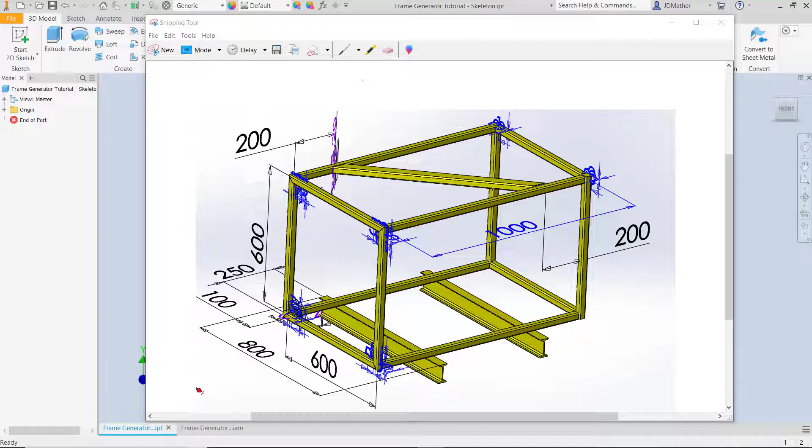In this example, I want to demonstrate how to use the frame generator to create this workbench frame that is 1,000 millimeters deep from front to back, from center line to center line, 600 millimeters wide by 600 millimeters tall, and with a cross brace 200 millimeters back from the front and forward from the back, and with two SB 80 by 6 beams at the bottom. So let's look at how to set this up.

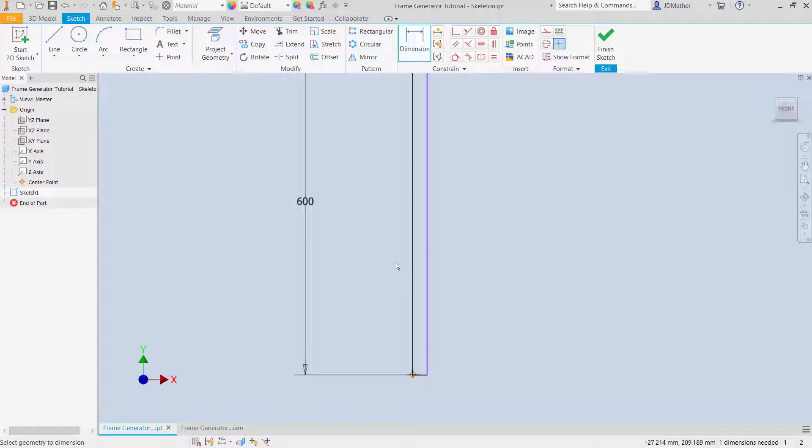First thing I'll do is I'll start a new sketch on the XY plane, and normally I model with symmetry about the origin, but let's say that we want to do some measurements, that we have a fixture that we need to have the origin in a particular location. And so I'll put the origin here in the lower left hand corner, and I'm going to dimension the height of this as 600, and let's assume that we might want to change the width to be other than 600.

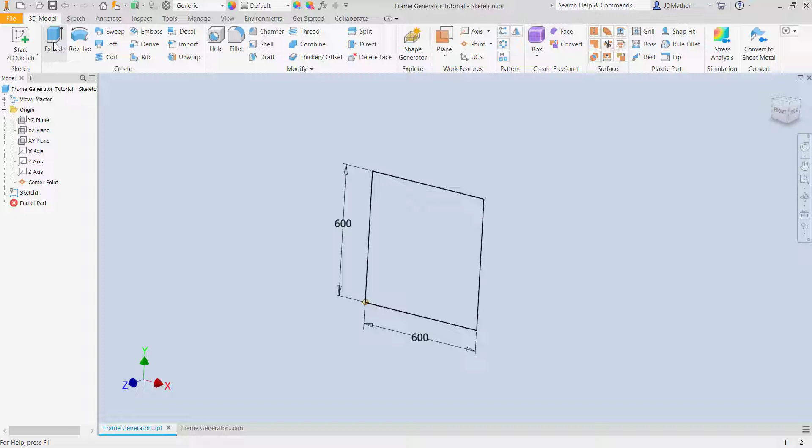So we'll start out with it as 600, but by putting a dimension in there rather than making it equal, we can change that dimension if needed to either make the height taller or shorter, or this width narrower or greater. And then I'm going to do as the next step a trick that a lot of people don't know about, in that I'm going to go ahead and extrude this rectangle, and I'm going to do it as a surface body rather than a solid body. So I toggle to a surface body, and I'm going to go 1,000 millimeters, and I want to flip the direction towards the back.

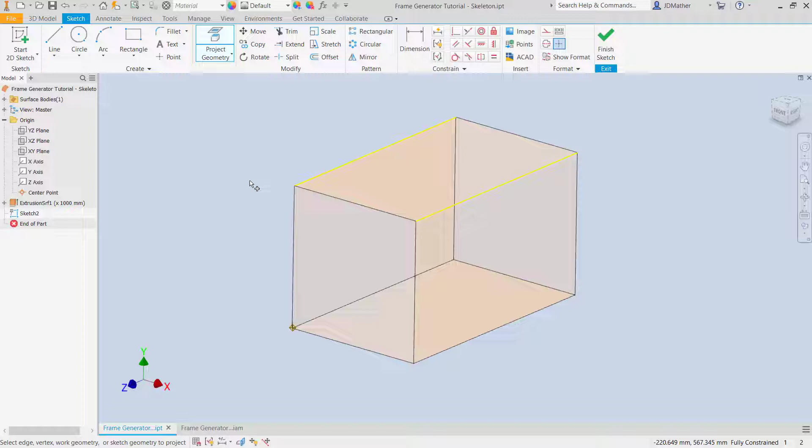All right, then I'm going to do a new sketch on this top face, and I will project geometry, this edge right here and this edge right here, and then I will draw a line. Now I might just do this as a 3D sketch rather than as a 2D sketch, but I've already started the 2D sketch. But a lot of times it makes sense to do a skeleton for a frame like this as a 3D sketch. So I'll dimension from this point to this point as the 200, and I'll dimension from here to here as the 200 as well.

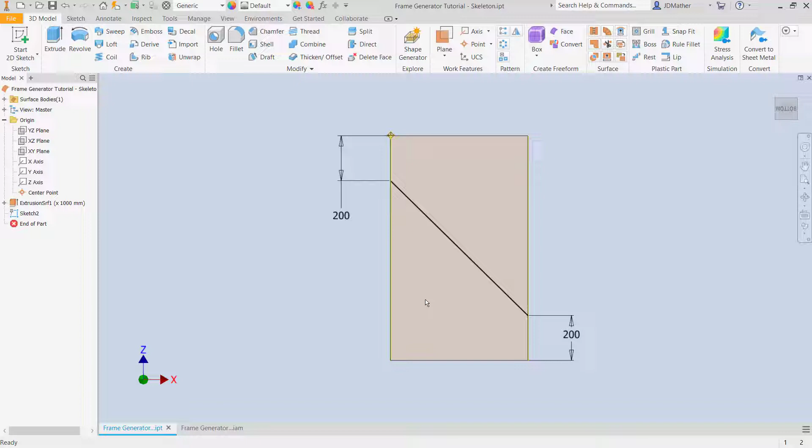I'll finish this sketch, and then I'm going to rotate around to the bottom, and I'll do a new sketch on the bottom, and I will draw a rectangle about like this, and then I'm going to put a line from midpoint to midpoint across that rectangle as well. I'm going to change all of these lines to construction, and then I will do a coincident, and I want to project first this bottom edge right here and this bottom edge right there, and then I'll do coincident of this line to the midpoint of this line.

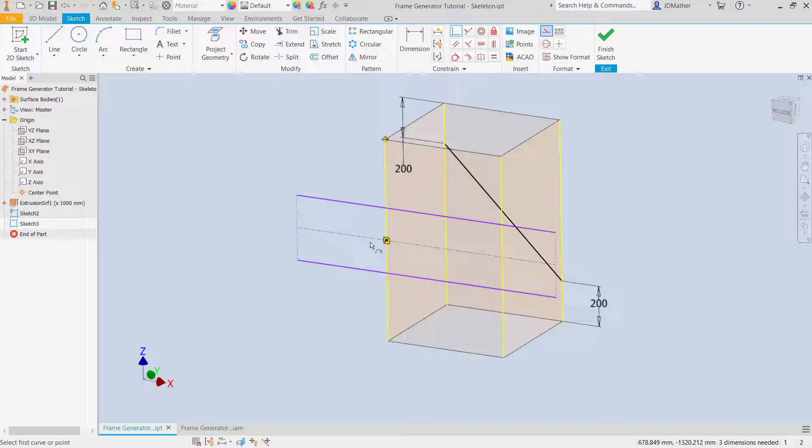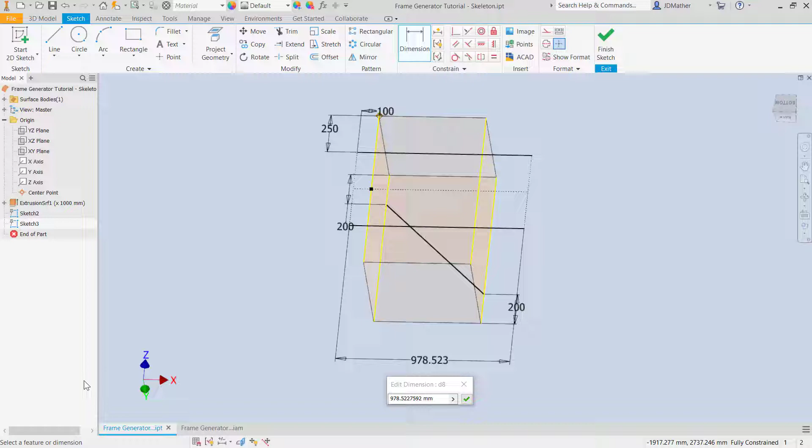And then let's put some dimensions in here. So I'm going to dimension the distance 100 from here to here, and I'll dimension the distance from here over to here as, and that should have been 100. Let's change this one to 250, and then I will dimension the width of this rectangle as 800, or dimension it to the midpoint of this line. So this line is the same distance on this side of the midpoint as this one. All right, I'll finish sketch, and I'm going to turn off the dimension visibility on both of these sketches.

And again, I could have done these two sketches as one 3D sketch. So a lot of times when I'm doing a frame skeleton, I prefer to use a 3D sketch on a box like, and I might use that box as a keep out zone or a keep within zone. In this case, we're going to run right down the center of the lines, but often I'll use that for keep in or keep out. Let's go ahead and save this, and I'll save this as frame generator tutorial skeleton.

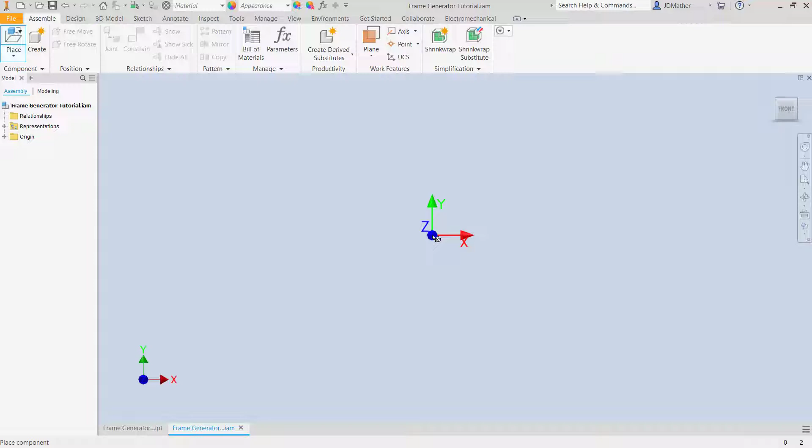Then I need to place that skeleton into an assembly. I'll go to an assembly, and I'll place my skeleton, and I'll place it grounded at origin, and so there is my skeleton. And then I will go to the design tab. If you are using Vault, you'll need to log into your Vault.

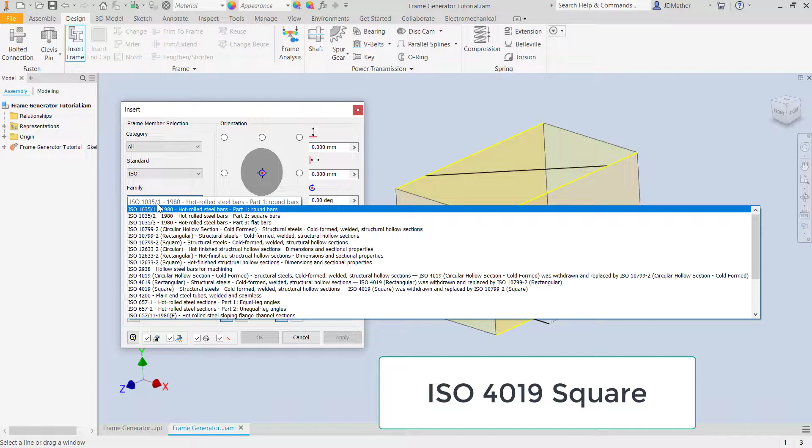I'm using desktop content, so I can go directly into insert frame, and I'm going to select ISO standard, find square, and select a size of 30 by 30 and 2.5 wall thickness. I'll then select this edge, and this edge, and this edge, and this edge. So I have those 4 edges selected.

I'll also select this edge, this edge, this edge, and this edge. You can select the edges of other bodies, surface bodies or solid bodies, or you can select point to point - you don't have to have a sketch in order to select an edge. I'll get these 4 edges, say OK to that, and apply to that.

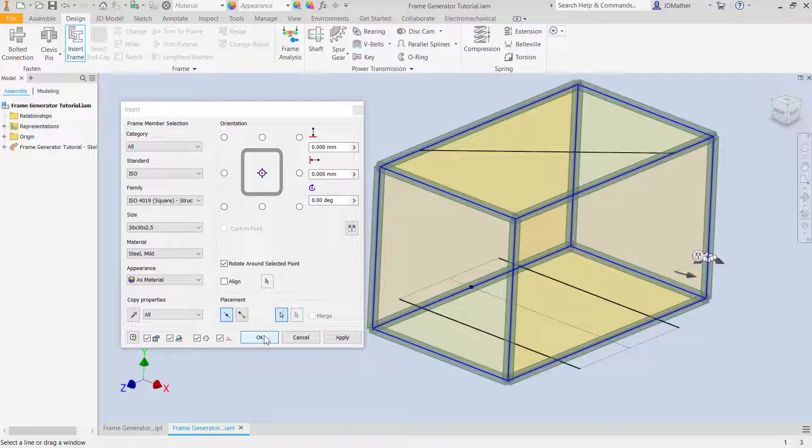I'll save those components, and then I'm going to change to a rectangular shape, and for the size I will select a 50 by 30 by 2.5 wall thickness, and I will select this line.

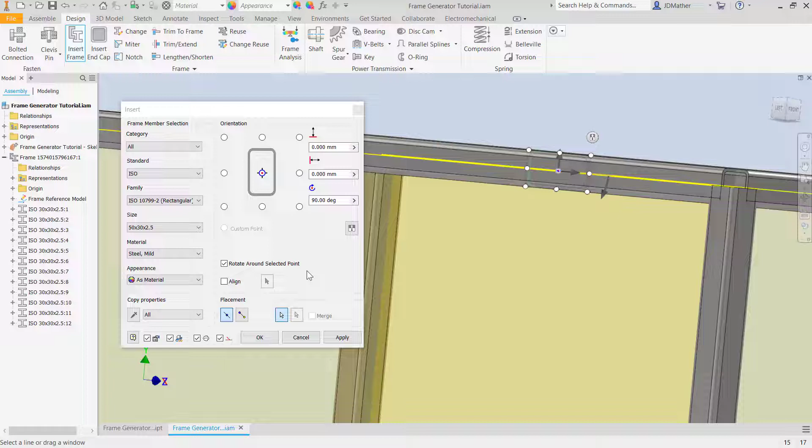Now, if we look at this from the end, we see that we need to rotate this 90 degrees. So if I drag this, it turns red at certain stop points, or I can just come over here and type in the angle I need to rotate it - in this case, 90 degrees.

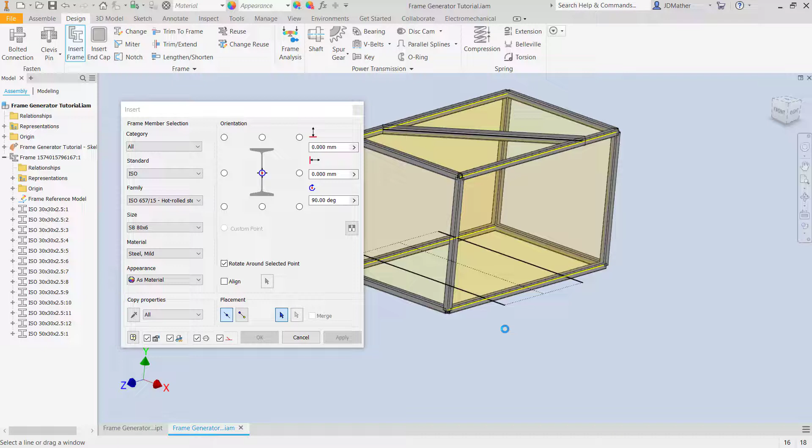I'm then going to place the two beams down here, so I'll do insert frame member, select ISO 657/15, and for the size I'll select the S8 80 by 6. Then I will select this line and this line, and we see that we need to rotate those by 90 degrees, so I'll rotate them by 90, either 90 or 180.

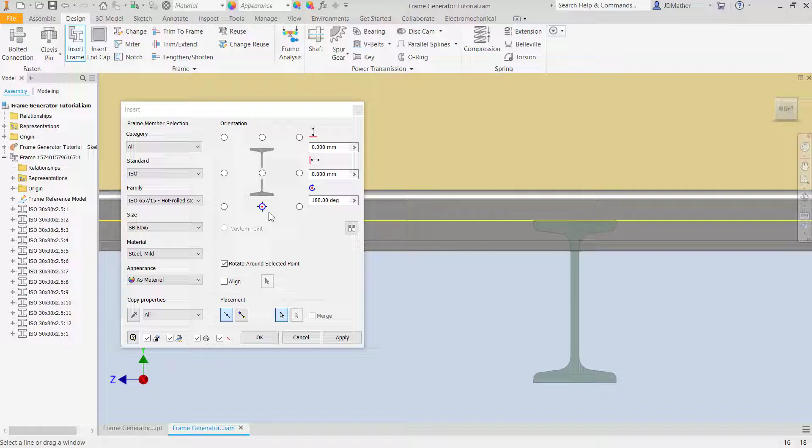I also need to move these down, so I'm going to select this point, but I need to move it down further. Remember, this distance from here to here was 30 millimeters, so I need to move this down another 15 millimeters. I'll do an offset of 15 millimeters, but I see it moved it up, so I need to put in -15, and that moved it down to the bottom of our frame.

I'll now turn off the visibility of the skeleton and save my file.

I want these four corners to be mitered, so I'll select miter, and I'll select these two components. I could also put a gap in here.

When we make parts in the real world, we can't cut exact lengths. So if we want to weld this thing up to be perfectly square, we need to cut some of the parts a little bit shorter so that we have some distance to play with in squaring up the parts. Because when we cut a part, some are going to be a little bit longer, some a little bit shorter, so we need our longest part to allow us a little bit of allowance to square up the parts. So I'll say apply to that, and let's add another section.

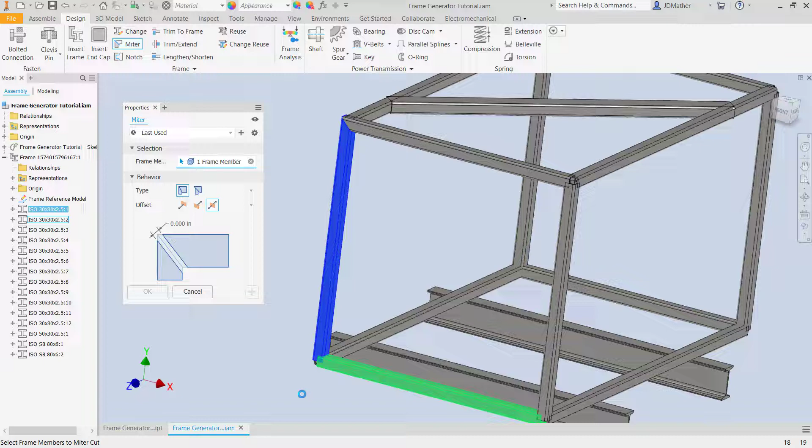So I'll select these two, and add that one. Then I'm going to put my clearance over here on this side, and make this real nice and big so we can see it. I'm going to say 5 millimeters - make sure you put the units in, because I noticed that was showing inch even though I'm in a metric file.

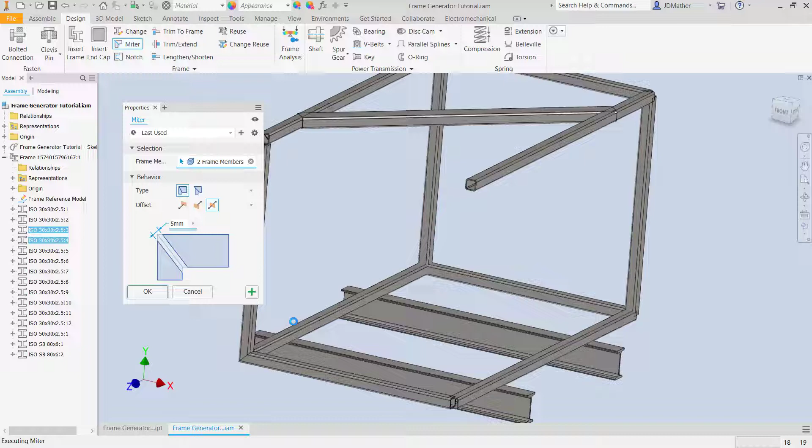Then I will select this one and this one, and when we do that, we see that we have a clearance in between here. Then I'll accept that one, and do this one and this one, so now I see that we have a clearance down there. So we can put these two up tight against each other and then do our adjustment on this side.

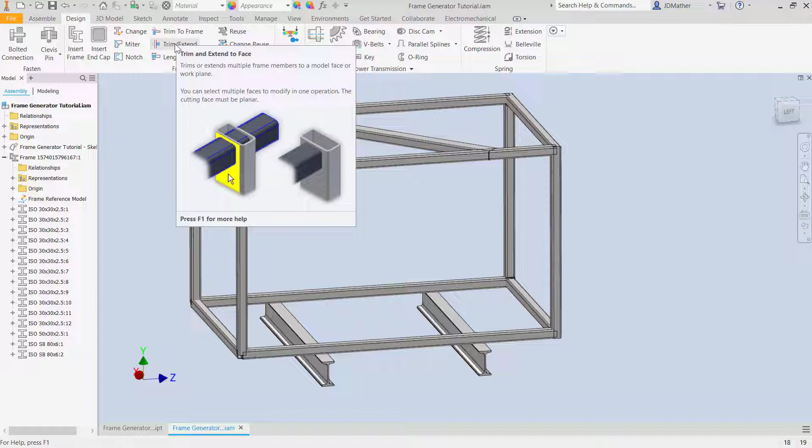Then I want these frame members to stop at here, so now I have two different choices. I can do trim to frame, or trim extend. Let's check trim to frame first - it says select members to trim cut, and then select frame members to trim cut. So the tooltip doesn't really give us a good idea of what's happening.

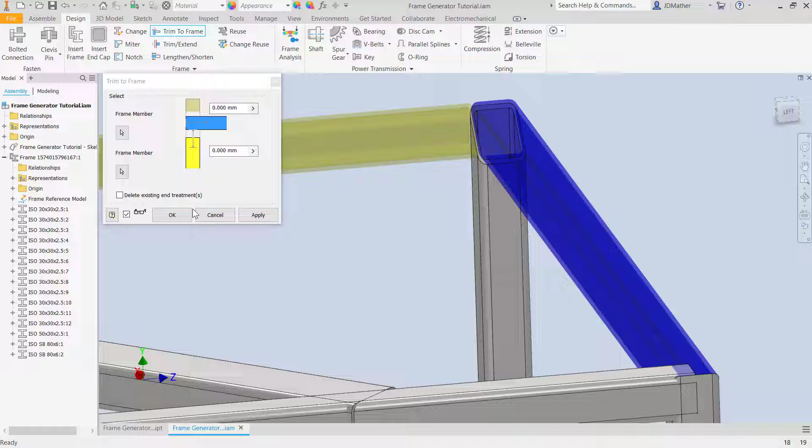I want to select this as the piece that I'm going to use to cut with, and then I'll select this one, and we see that it trims this one back to that location. I'll say okay to that. It says there's a problem with this because of a previous end treatment that we have, so I might not want to do it that way.

Let's do a manage rebuild all, make sure we don't get any errors. So I'm not getting any errors, but I'm a little concerned about that technique, so let's look at a different technique. Instead of doing trim to frame, I'm going to do trim or extend, and it says select frame members to cut or lengthen, so I want to cut this one and this one, and then I can select the face that I want to use to cut with, and I can select any one of these planar faces, this one or this one.

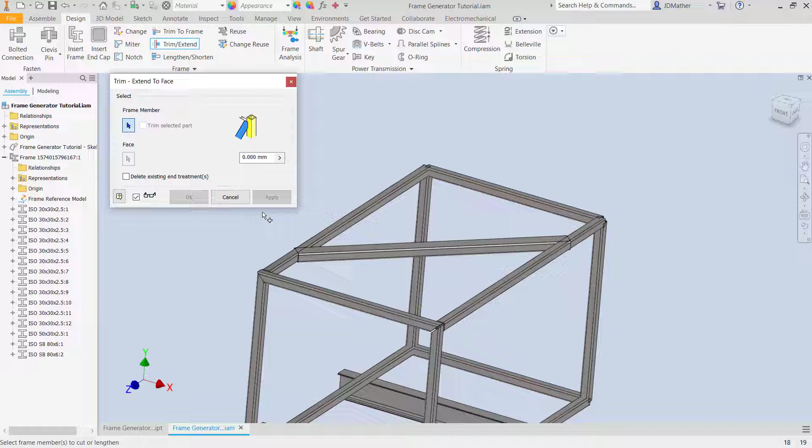It will extend that out and cut those pieces off, so think of those surfaces as going out to infinity. All right, then I'm going to go ahead and trim this part, so I'm going to trim that face, that frame member, and then for the face I will select this end, and then I want to do it over on the other side. Now if I wanted to notch this to have it go around the arcs here, I can attempt to do that with trim to the frame, or I can do the notch.

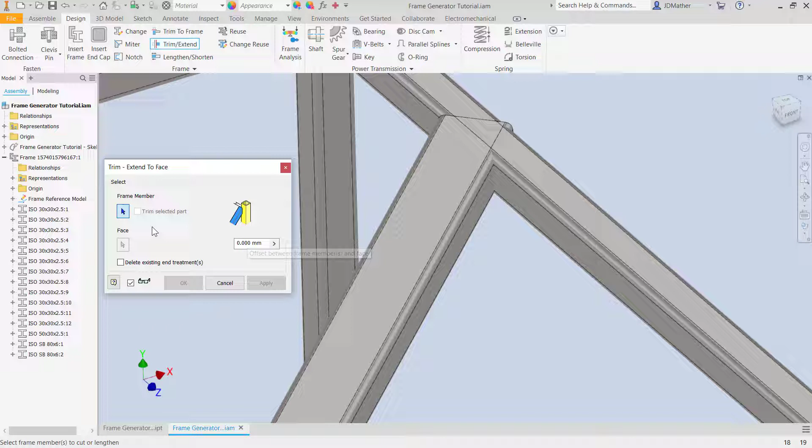I want it to be flush with this face, but I'm actually going to put in an offset distance. So I'll select this frame member to trim, trim it to this face, and let's do a 5 millimeter offset. I'm making that nice and big so we can clearly see that offset. We might not want an offset that great.

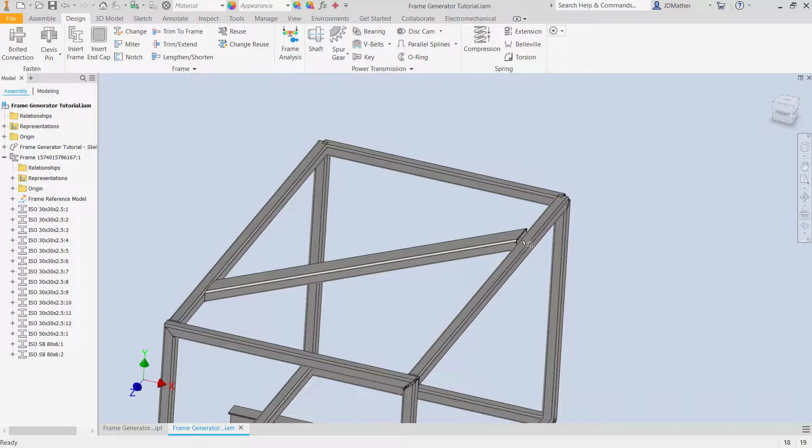All right, so that gives us some clearance so we can put this part in here and weld it, and we have some adjustment here, and we can fill that gap with a weld bead. We don't necessarily have to have it that great to start with. I'm then going to trim off these two components with this one.

So let's try to trim to frame again. I'll select first the piece to use to define, and then I want to trim this part, and we see that this one goes down and this one gets cut off, right? I'll apply that, and then I'll do that again.

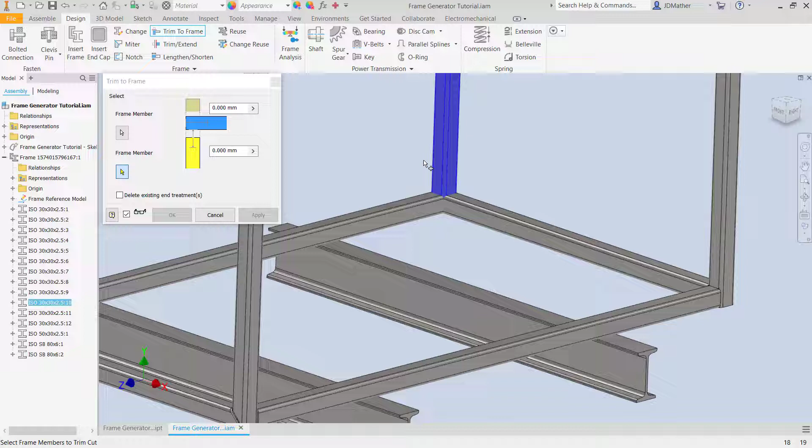I'll select this one and this one, so now this one will get cut. I'll come over here, select this one, and then select this one, apply that. So this gets extended. I'll select here and then here, then this one will get cut.

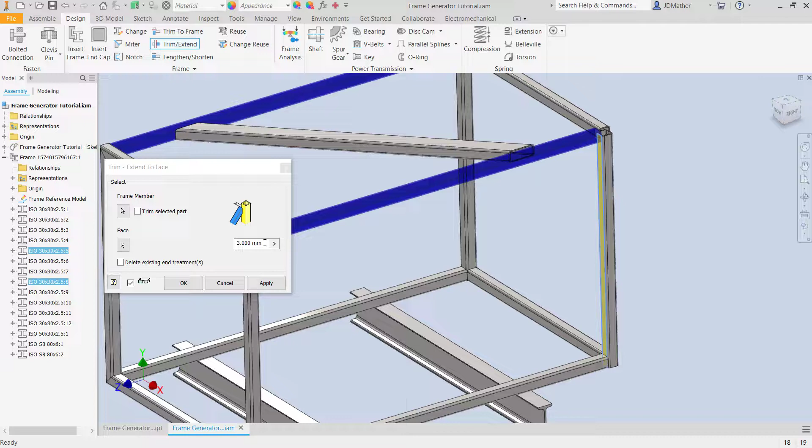I'm then going to trim these two members off with this frame, and I can do both of these two at the same time. So I'll do trim extend, select this one, and then the face I'll use is this face, and I want to put in an offset on this one. So I'm going to put in a 3mm offset on this one, and we'll see that we have a little gap in between here.

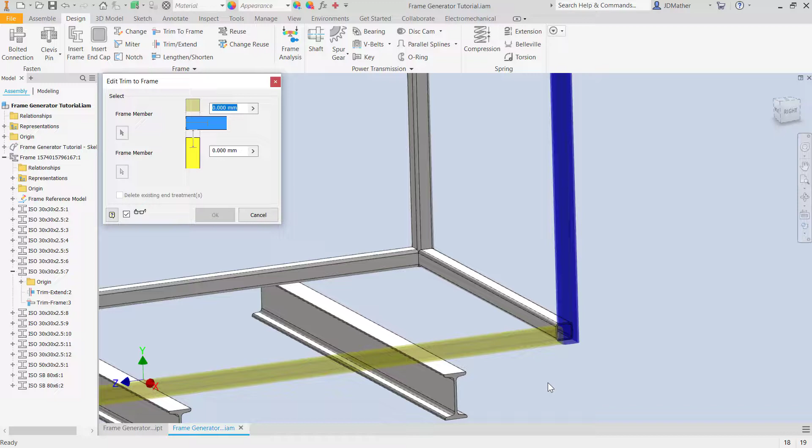Now actually I decided I don't want the gap on that side, so I'm going to undo that, and I'm going to do this one - I really intended for this one down here to have that 3mm gap. So let's edit that end treatment, and we'll put in the 3mm gap down here.

Okay, so now we see that we have a gap here, and I also want a gap over here, so I'll edit that one with the frame generator. I'll expand this one, find that trim, and edit that end treatment with the frame generator, and let's put in a 3mm gap on that end.

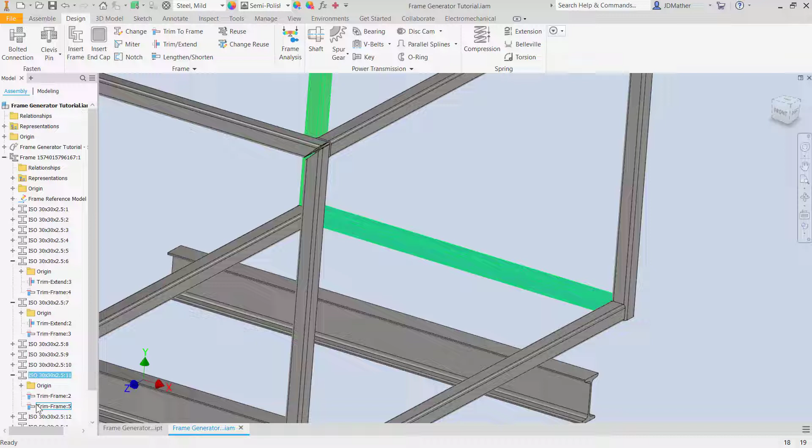I also want a 3mm gap on this end, so I'll find that frame member, and come down and find the trim for this one. So I'll edit that with frame generator, put a 3mm gap on this end. So now I have a gap in here.

So we have some allowance that we can move this piece back and forth to get everything squared up. We need to do the same thing up here at the top, so I'll do trim to frame, or trim extend, and I'll trim this part.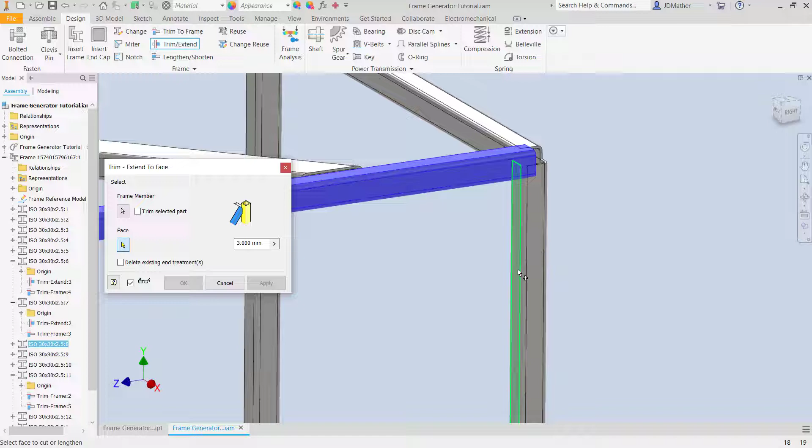I'm going to use this face to trim it with the 3mm gap, and this part using this face with the 3mm gap. On this side I don't want the gap, we'll butt those up against each other, so I'll put this back to 0.

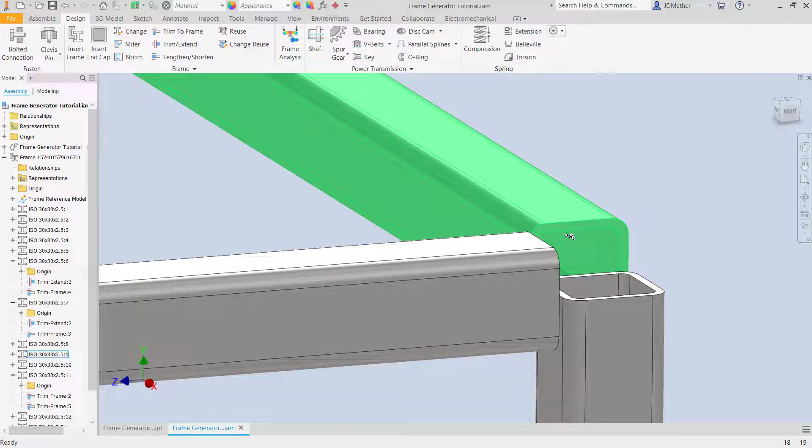Then I'll trim this piece with this face, and I'll trim this piece with this face. Now I want this piece to come up 3mm below the top of the frame, so I'm going to extend this piece up to this face, but I don't want it to come all the way up, so I'll do a 3mm gap, so it will be slightly below.

Apply that, and then I'll do the same thing over on the other side. I'll select this part, want to come up to this top face, but with the 3mm gap. I'll say OK to that.

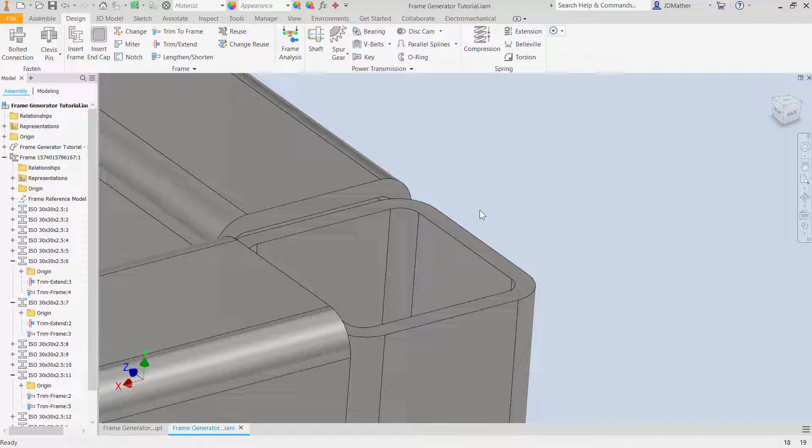Now I want to put an end cap on these two vertical tubes, so I will click on Insert End Cap. I'll select this face.

Now if you're using desktop content, you need to make sure you have the custom content library installed to use the frame generator end cap. So I got an error, so I need to install it into my desktop content.

If I close all of my files and then go to the active project file and select Configure Content Center Libraries, I see that the custom content was installed, but it wasn't selected in my project file, so I have to select that.

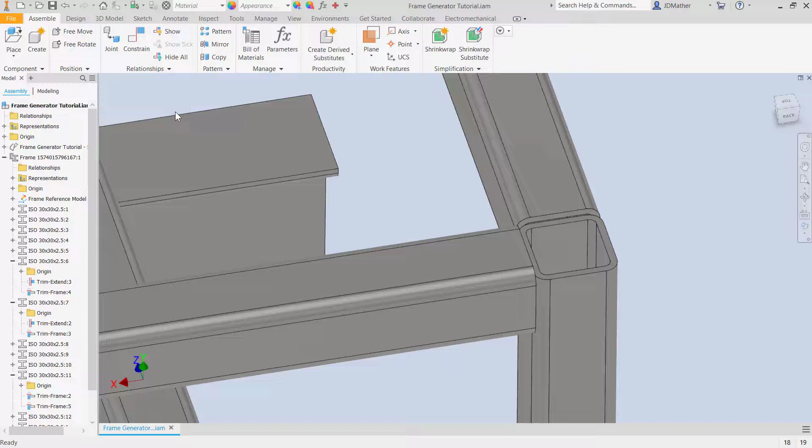I'll say OK to that, and done, and then I'll reopen my frame, go back to the design tab, and do insert end cap again, and select this face. This time I don't get an error on that.

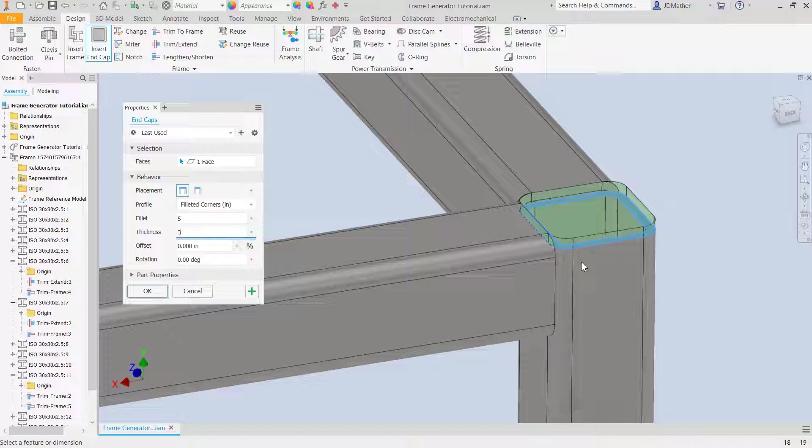I'm going to put a fillet radius of 5 on here, and I want the thickness to be 3mm so that it will be flush with the top of the frame. And then I want an offset distance. I can do this as a percentage of the thickness of the beam, or I can put it in as a distance.

I will do an offset distance of 0.5mm, and then I will add the second one, come over to the second end, select this one, and I'll say OK to this one.

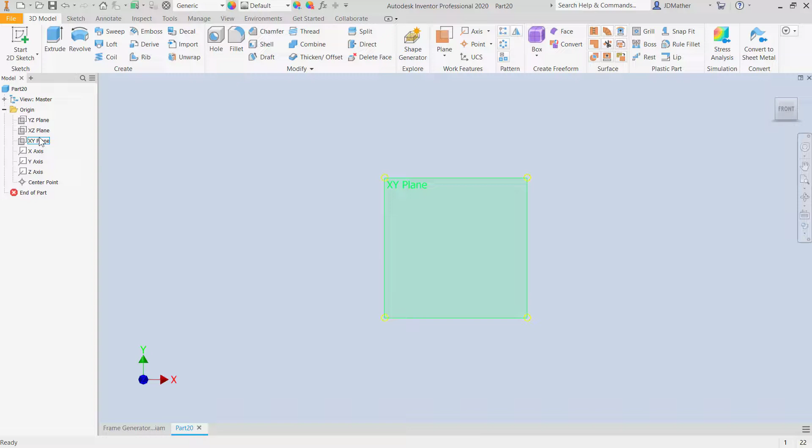I want to put gussets in these 4 corners, so I will have to model those parts. I'll do a new part file, select a metric template, and start a new sketch on the XY plane. I'll draw a rectangle at the origin, dimension this height of the rectangle as 50, and dimension this as 50.

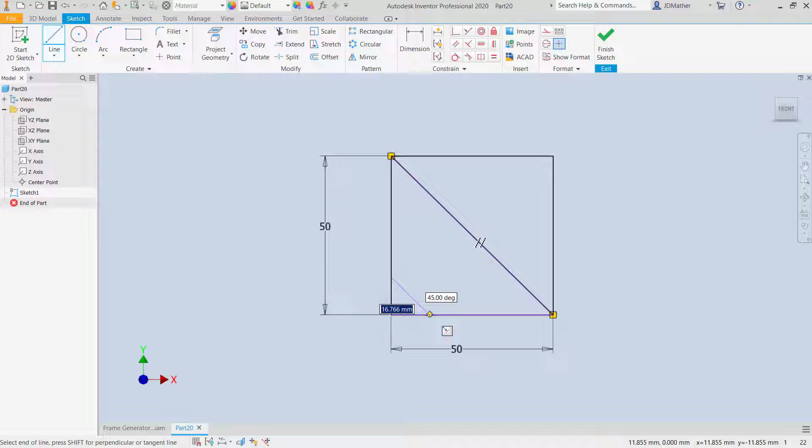Then I'll draw a line from corner to corner across here, and I'll draw another line. I want this line parallel to this line, so if I scrub that line, don't click on it, but scrub that line, it should put the parallel constraint on there automatically. Then I'm going to dimension this distance from here to here as 12.5.

I can then extrude this, and I'm going to extrude that mid-plane distance of 10mm. Save my file, I'll call it corner gusset.

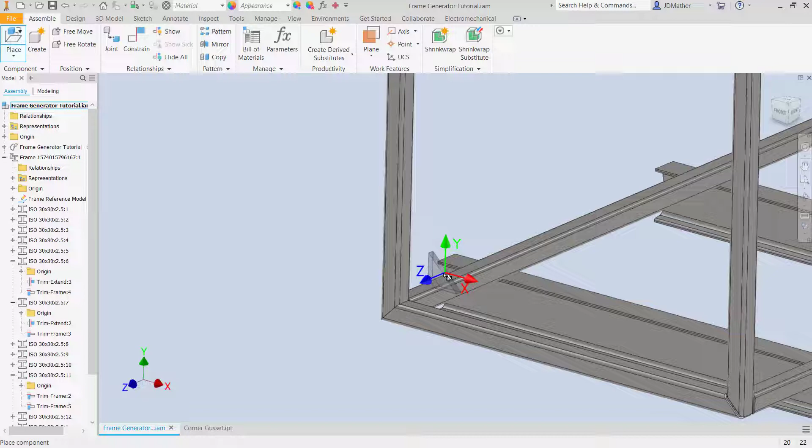Now if you create a library of these gussets, then you do it one time and you're done. So I'll do place on the assemble tab, and I'll get a corner gusset. I'm going to place one in this corner, one up here, one over here, but here.

I then need to constrain these gussets, so I'll do constrain, and I want this face right here constrained to this face right here, and then I want this face constrained to this face, and we'll move it in the center here in a minute. Then I want this face constrained to here, and I want this face constrained to here.

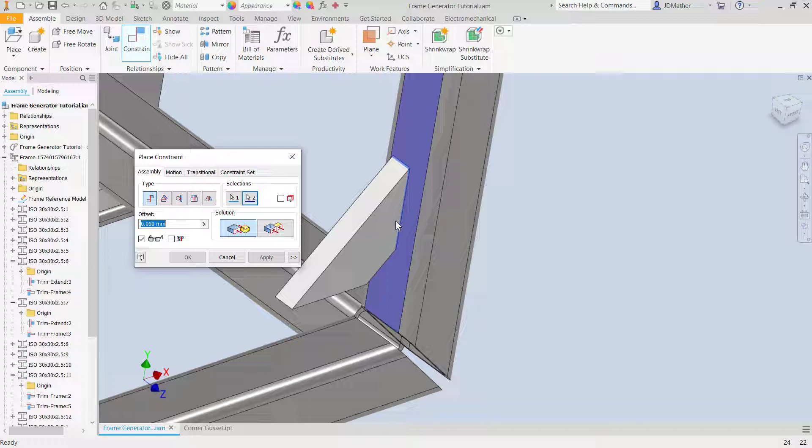And then on this one, I want this face constrained to here, and this face, I got the wrong edge, so I'll control unselect that edge, and I'm having trouble getting it, so I'll just do the command again. So I'll do constrain this face to this face, and I've got one more. I will do this face to this face, and this face over here to this face.

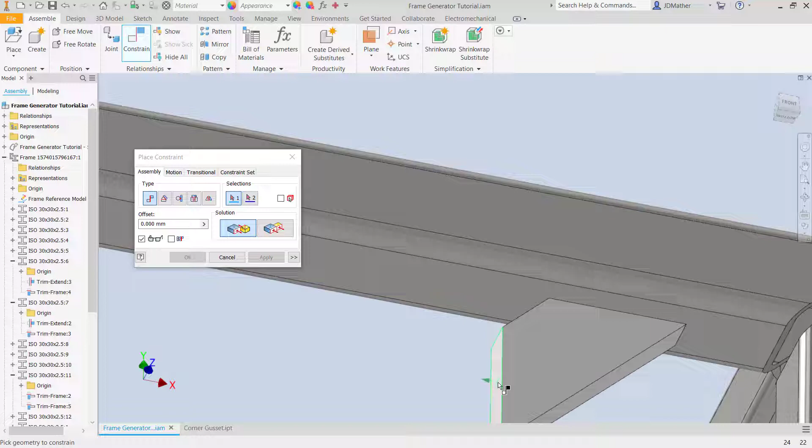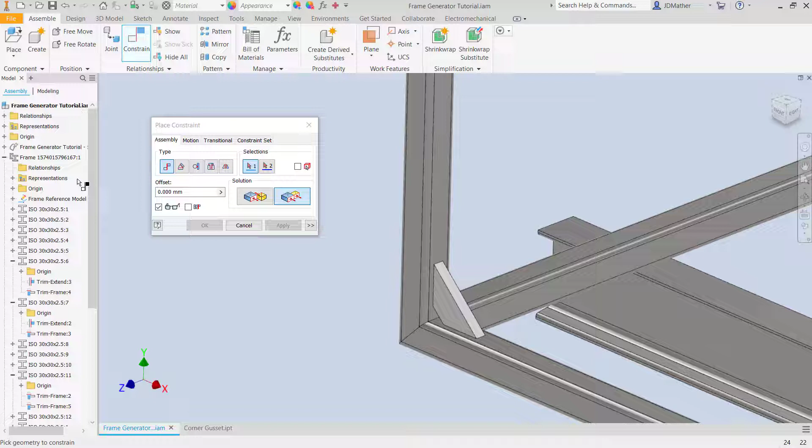Alright, now I want to center these up, and if you remember earlier, I did the sketch on the front plane, and so I can go to these gussets, and I can do this a couple ways. Maybe I want this to be behind the front plane, or I want it to be in front of the front plane, or I want it to be centered up with the front plane. I'm going to do flush, and I will expand the origin XY plane. So I'm going to do flush the XY plane of the assembly to the XY plane of the first corner gusset. So that moves that one in center, and then I will do the second corner gusset.

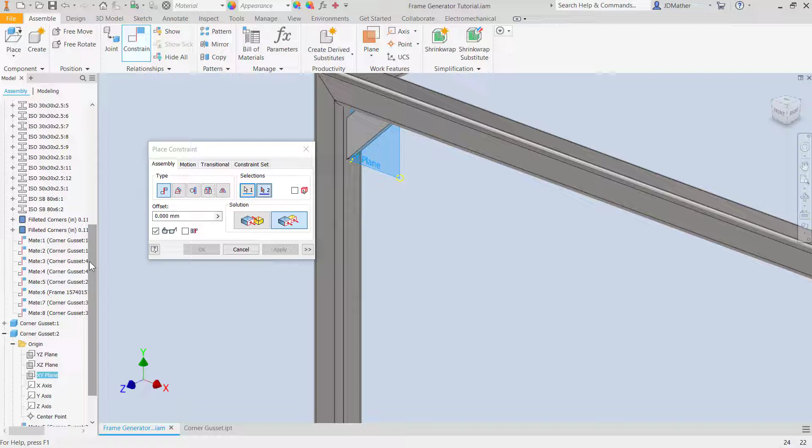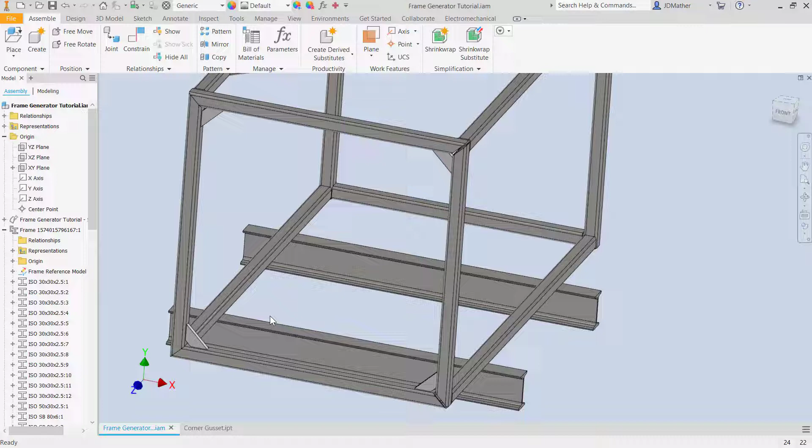Now I need to be careful; some of these will be mate instead of flush. So I'll attempt to select the XY plane, but if it gives me an error, then I need to edit that relationship and put it on mate instead of flush. So that was the second one. For the third one, I'll select the XY plane, and for the fourth one, I'll select the XY plane and the XY plane on this one. Okay, so if I try to move these four gussets now, they are fully constrained. They don't move. So my frame members are in this folder, and then my corner gussets, and also my end caps in this frame folder.

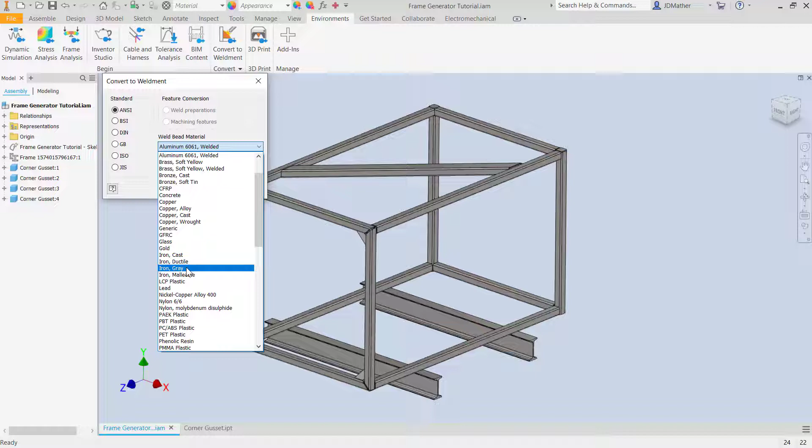I want to put some weld beads on here, so I'm going to go to environments. I'm going to convert this to a weldment. It gives me some warnings, and I'll go ahead and accept that warning. I'm going to tell it that my material is steel. Then I'll go in and put some weld beads. So I'll go to welding, and I can do a fillet weld. I will select this face first, and then for second face, I'll select this face and this face. I'm going to put in a bead of 3 millimeters. We see that preview. I'll apply that weld.

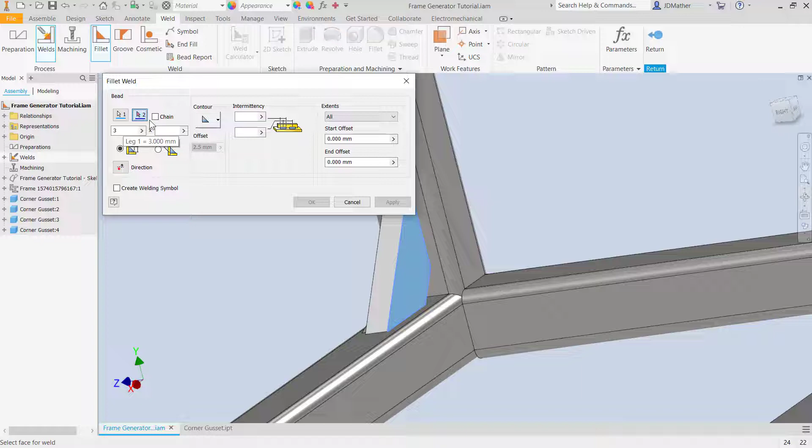Do the same thing over on the other side. So I'll select this face first, then second face. I'll select both this face and this face to put those weld beads in. Now the reason for putting this chamfer in here is so that we can put a weld bead in there. Now if this part was going to be welded at the same time as these two parts, we might not need that, but if these parts were going to be welded first and then that gusset put in here, there would be a weld bead going across there. Let's go ahead and put that weld bead in here. So if I put a weld bead between here and here, we need that gusset in order to clear that weld bead.

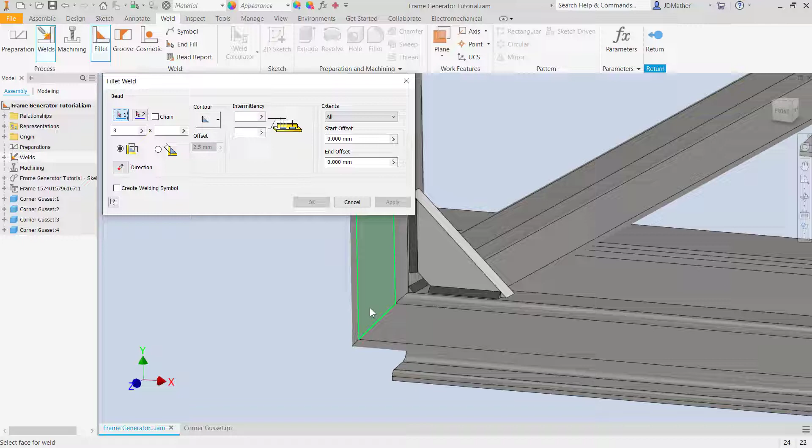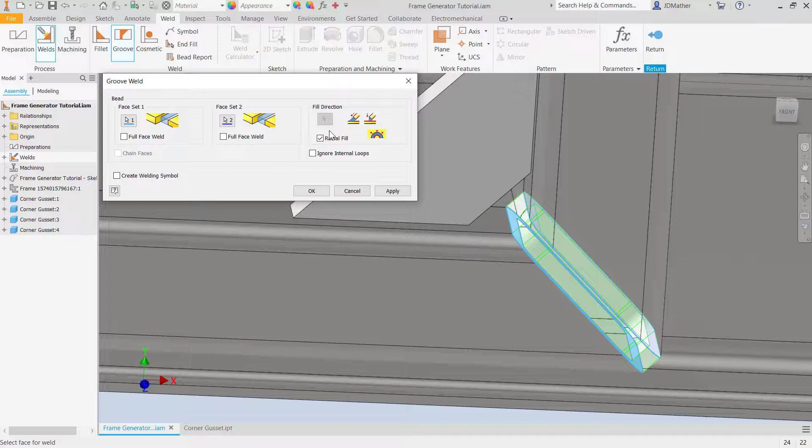And there's some cases where we have some gaps in here, and so to do that, instead of doing a fillet weld, I'm going to do a groove weld, and I will select this face, and then for second face I'm going to select this face, and then I need to set a fill direction. I can either try to do a radial fill, and if that doesn't work, I can click on a face to set a fill direction. So let's try to select that. It would do it perpendicular to that face. So in this case, either way will work.

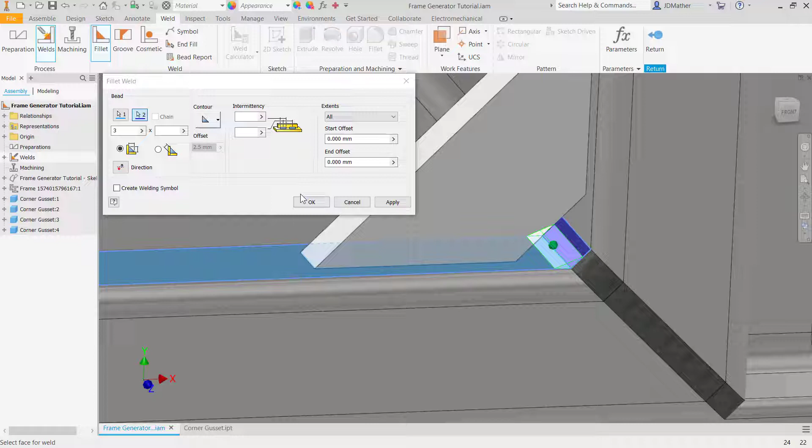Now once I've filled that gap, now I can put a fillet weld across there. So I could do a fillet weld and select this face, and the second face I could select this face and put that across there. Maybe I want to make this bigger, in which case I'll also select that face, and instead of 3 millimeters, let's make that 5 millimeters. So it'll go all the way across, or I could even do that bigger, let's say 6 millimeters. So continue through welding up all of the components, and that completes this tutorial.